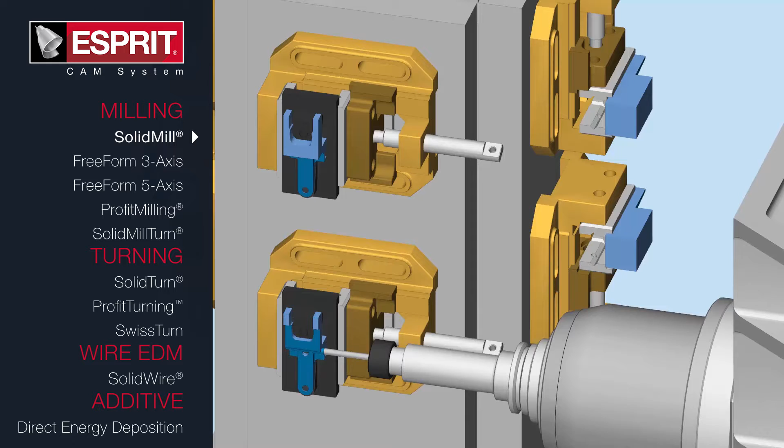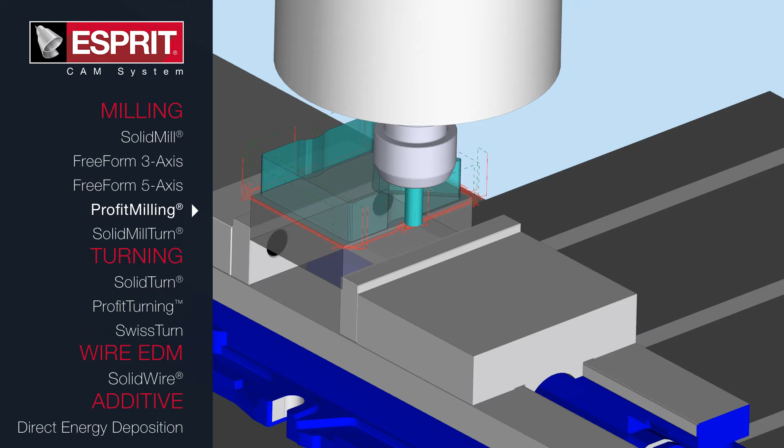Esprit is a powerful CAM system for CNC programming, optimization, and simulation, supporting the entire manufacturing process. With factory-certified post-processors delivering machine-optimized G-code, and Esprit's ability to solve unique challenges with automation solutions built using the software's API, Esprit is the smart manufacturing solution for any machining application. With world-class technical support, Esprit empowers you to get started quickly and keep running at top efficiency.

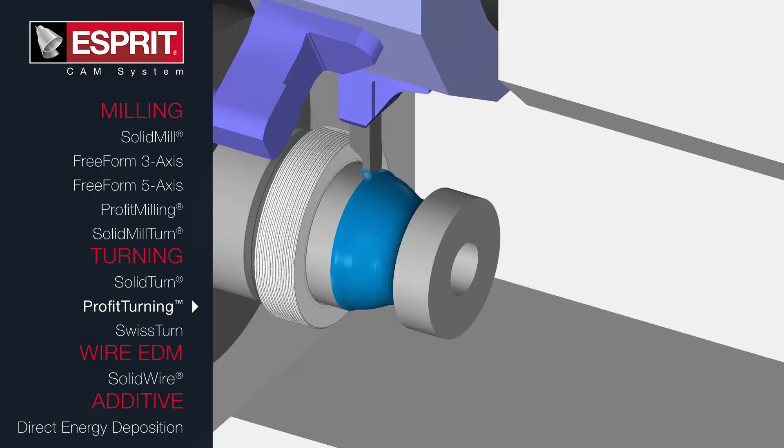Esprit's ability to support the entire manufacturing process starts with the large line of products available with the software. Esprit's capabilities go from 2 to 5-axis milling to 2 to 22-axis turning, or even 2 to 5-axis wire EDM. Esprit also excels in more complicated applications, such as high-speed simultaneous 3, 4, and 5-axis toolpath. Its ability to perfectly run Swiss turn, mill turn, and B-axis multitasking machines makes it the only CAM system you'll ever need.

The Esprit Additive Suite drives both 3D powder bed fusion systems and direct energy deposition machine tools. This powerful suite provides comprehensive control over the additive manufacturing process and delivers machine-optimized job files.

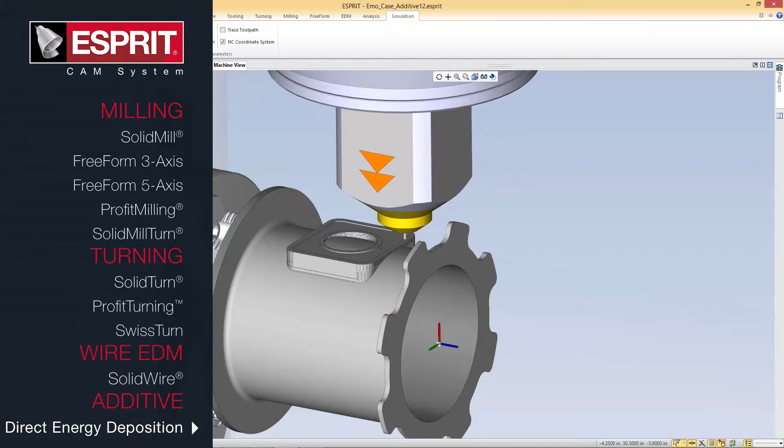Integration with cloud-based databases such as Machining Cloud facilitates access to knowledge, product data, resources and process controls for machines, cutting tools, and work holding. Using those integrations and simulation technology, Esprit allows you to create a digital twin of your machine tool for programming, optimization, and simulation.

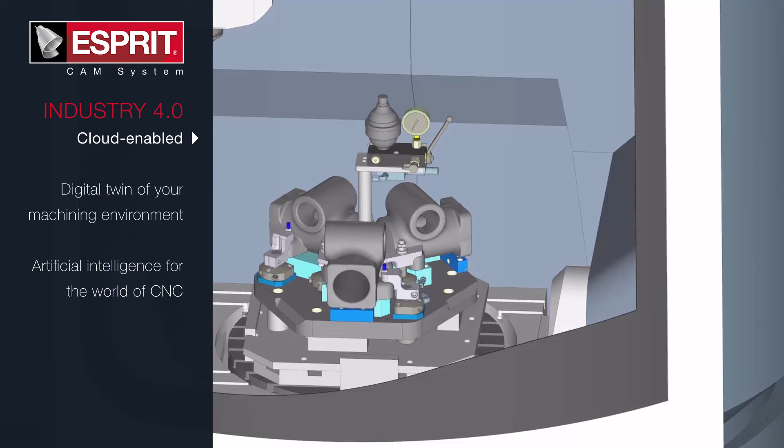Workpieces and cutting tools are set up virtually, resulting in exacting simulations, better toolpaths for higher quality parts, and greater productivity. What happens on screen will also occur on the shop floor.

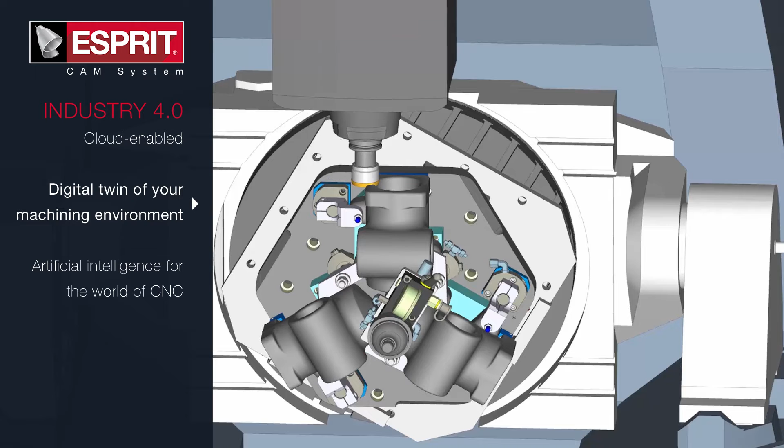Esprit Knowledge Base streamlines part programming by automatically selecting the optimum processes, machining cycles, cutting tools, and machining conditions for part features based on proven best practices. Because programming is more predictable and consistent, machine operators encounter fewer problems, and machines produce higher quality parts.

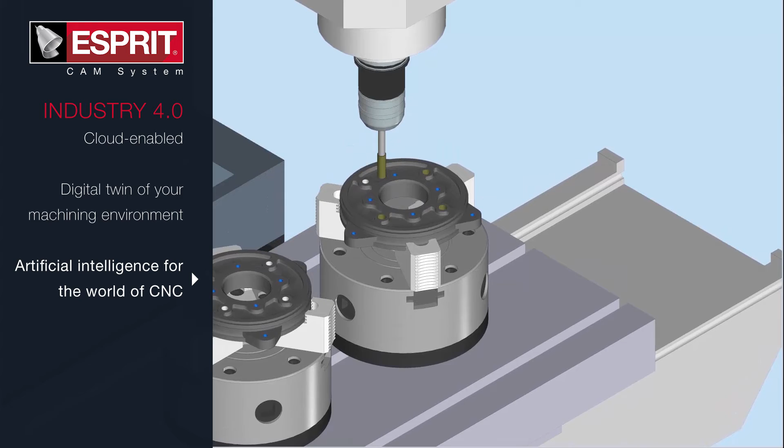Unlike traditional CAM software, Esprit's awareness of machine kinematics and dynamics is used for setup, programming, optimization, and simulation. With machine awareness, CAM programmers make better choices regarding toolpath, resulting in improved machining performance.

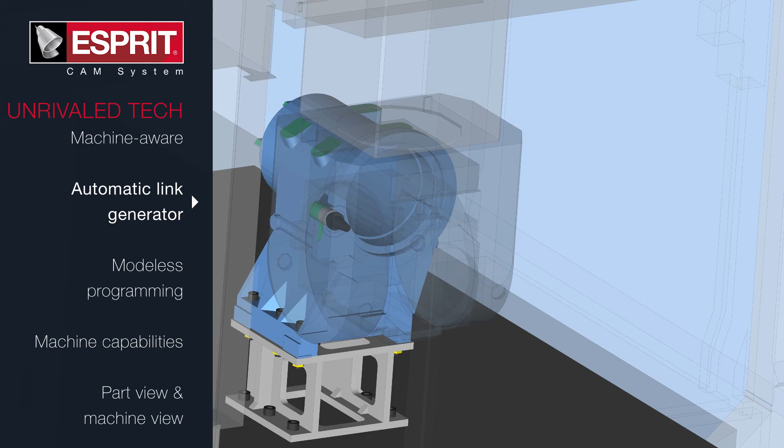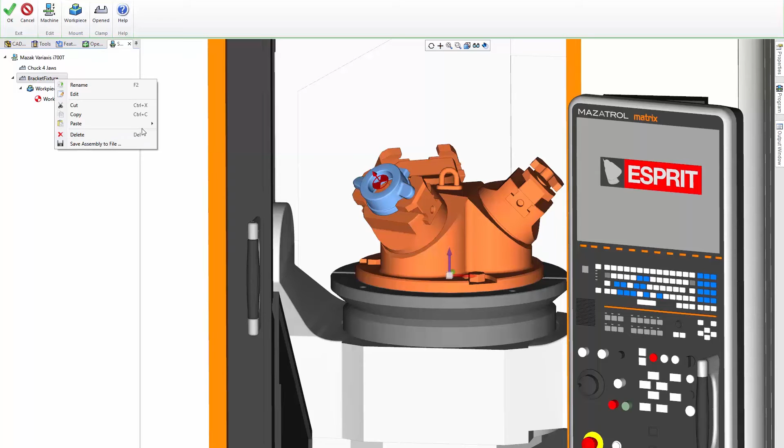Using the digital representation of the machine, Esprit automatically manages rapid positioning between cuts. The linear and rotary position in between cutting operations, tool changes, and part handling operations is performed safely and efficiently. Esprit makes it easy when changing modes and machines. Simply program once, and Esprit recomputes based on the new machine's kinematics, so you never have to start from scratch.

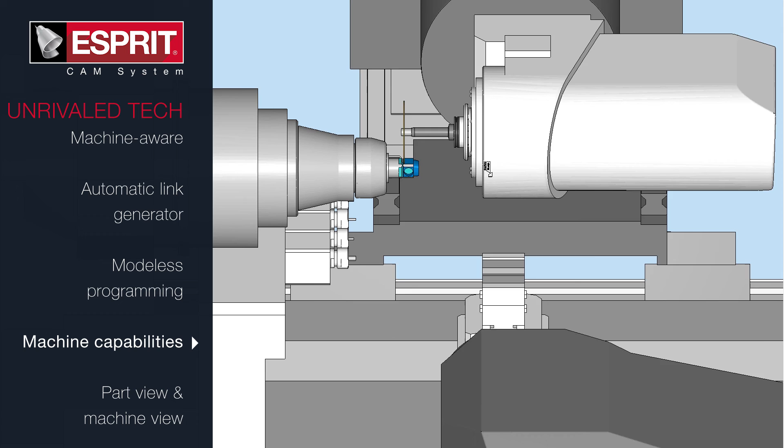Esprit's partnership with machine tool companies enables the ability to simulate and run any type of machine, regardless of machine kinematics. Esprit's Part View, Machine View patented technology makes it easier to program your part and see how your changes affect your operations in simulation.

With an extensive local support network, the Esprit team will support you anywhere you are, in your native language, so you can get started quickly and keep running at top efficiency. Esprit is the only CAM system you'll ever need.